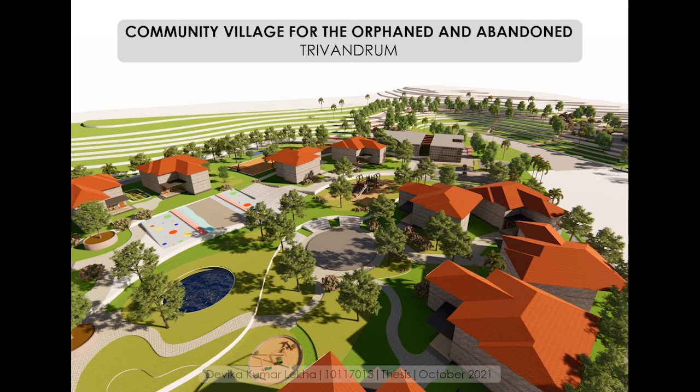My name is Devika Kumar and my thesis topic is Community Village for the Orphaned and Abandoned, Trivandrum. What is an orphanage? An orphanage is a residential institution for the care of children who are orphaned and abandoned, that is, do not have any caretaker to look after them and their basic needs.

These children come from various disturbed backgrounds and are deprived of all the basic necessities of life, which also includes happiness, comfort, and care. The number of orphans globally is noted to be on a drastic rise due to factors like wars, poverty, epidemics, natural disasters, and the list goes on. The children left behind lead terrible lives, and the reflection of their scars remains throughout.

This is where an orphanage comes into picture by providing a home and a board that provides them with basic necessities such as food, shelter, clothing, and above all, care and comfort. According to UNICEF, which is the United Nations International Children's Emergency Fund, an estimated 153 million children worldwide are orphans, and this is still on the rise.

The global estimate of countries with highest orphan rates shows that India falls among the top 10 countries that contribute to the world's large orphan population. In Kerala, orphanages constitute the highest in number among the types of care homes in the state. The present condition of a majority of these orphanages is of poor housing quality, and the so-called orphanages are usually old buildings that once served a different purpose.

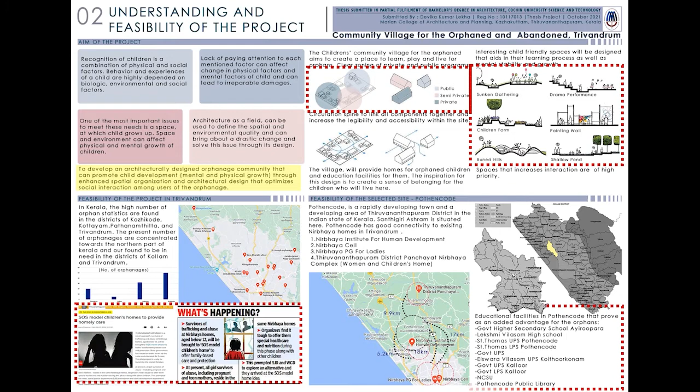I have chosen my site at Pothencode considering its development, good accessibility and most importantly, its proximity to existing Nirbhaya homes in the city. The educational facilities in Pothencode also serve as an added advantage for the orphans.

Site analysis, location and context. The site chosen is located in Pothencode and the land is owned by the Shantigiri Trust. It is 25 acres in area and currently a vacant plot. It is situated exactly 1 kilometer east of the Poolunthara junction and all necessary services are located in a radius of 7 to 10 kilometers from the site.

The Poolunthara junction is located on the main central road, which is the Kazhakuttom-Kilimanoor road. The secondary connecting road connects it to our site. The neighborhood context of the site is residential, with the maximum building height being 8 meters. The commercial area is located on either side of the main central road.

Major landmarks in the area include the Shantigiri Ashram, which is located approximately 5 kilometers from the site, the Shantigiri Ayurvedic Hospital and Research Center, and the Siddha Medical College, all located in close proximity to the site.

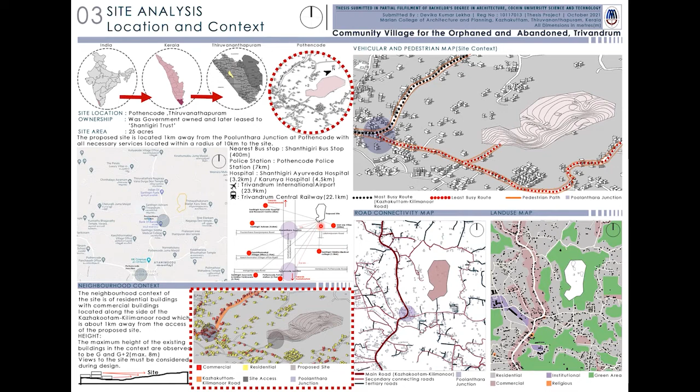Site and its features. The site is currently a vacant plot with thick vegetation and used for small-scale purposes such as to dry cow dung for medicinal purposes of the Shantigiri Ashram. Climatic study of the site throws a light on its wind direction, which hails predominantly from northeast to southwest direction. The temperature graphs show that the maximum temperatures occur during the months of March and April, and the monsoon is recorded from June to September.

Since the site consists of alluvial soil of high fertility, it consists of thick vegetation that mainly includes trees such as coconut, teak and mango. The site topography is a hilly terrain with contour of maximum height of 14 meters. The site currently has a temporary residential area for workers of the Shantigiri Ashram. Figures of the site drawn show wind flow, natural drain of the site and its highest and lowest points leading to its catchment areas.

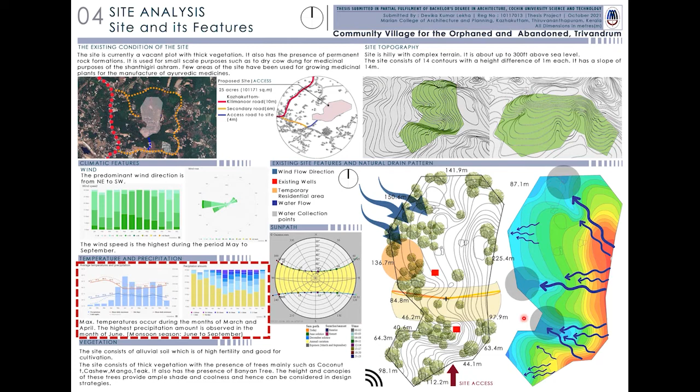Site views, sections and SWOT analysis. The site views depicted show views to and from the site. Due to its thick vegetation, the views are mainly positive views of lush green surroundings. The section of the site shows the contour and gives an outlook of its slope. The SWOT analysis draws attention to its design in manners of accessibility and high elevations that should focus on the safety of children. The site contours enable connection as well as provide an opportunity to explore in terms of connectivity between the spaces.

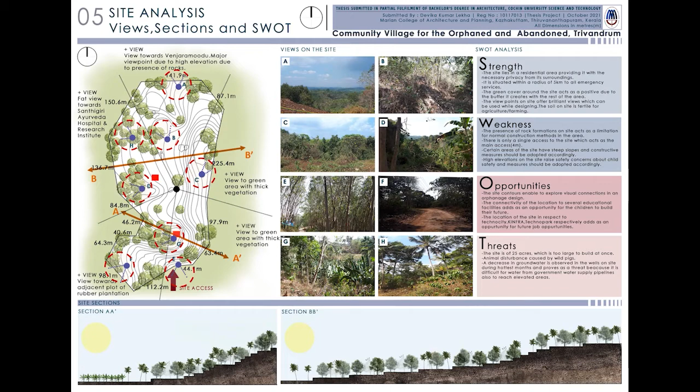Design strategies and inferences. This sheet shows the inferences gathered from my study. Location and neighborhood context-wise, the site is at an advantage of being in a residential zone away from the main city disturbances, as this provides it with its required private zone and also a residential setting. The site accessibility is limited to just one access or entry, and alternative entry points are to be considered. The site proximity to the main road and primary services such as hospitals, police station within a radius of 4 kilometers proves an added advantage.

The existing site contours enable to explore different methods of construction considering the natural drain. The vegetation of the site shows us the presence of large canopy trees that can be used extensively for shading and cooling purposes. My project calls for a lot of open spaces and gathering spaces that includes play areas, and hence a majority of trees are to be and can be incorporated in the design. The vegetation can also be used as buffer regions to segregate private, semi-private and public zones on the site.

The consideration of climatic factors proves the feasibility of an open plan, which is the main objective in the community village. The sun path is from east to west, and hence orientation of buildings can be done in the same orientation with proper shading devices, and north to south direction regions can have more of open and gathering spaces. Wind cooling design strategies such as wind catching towers, jali walls, etc. can be provided. KMBR rules considering existing wells on site state that the location of septic tanks must be 7.5 meters away from the wells.

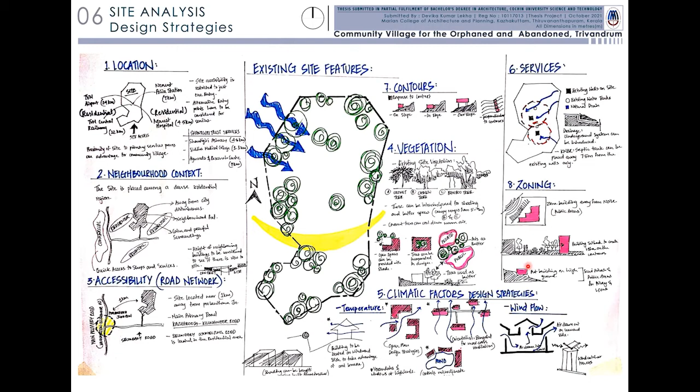Live Case Study 1, Sai Gramam, Trivandrum. The Sai Gramam orphanage is located in Thonnakal, Trivandrum. It is an orphanage for boys of the age 4 to 18 years. The orphanage houses various activities as well. The reason I chose Sai Gramam is due to its community-type living and how various activities are brought into the project. I also focused on how the spaces are arranged and how the relationship affects the children.

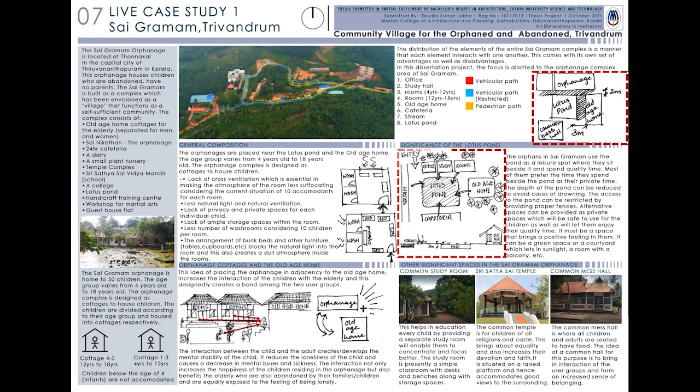Live Study 2, SOS Village, Kochi. I studied the SOS Village, Kochi that nurtures over 150 children. It is situated in Aluva. The reason why I chose to study this is because of how it is planned. The SOS Village is planned in a manner that it has 15 houses with 8 children housed in each, and it is arranged in a semicircular pattern on the site. Each home has one caretaker who is called the mother to look after the needs of the children belonging to that particular house.

The site is designed with ample shade provided using its landscape and creating exactly a residential neighborhood atmosphere. This proves to be a really good factor that enables the children in the village to grow mentally and induces high levels of interaction between them. The major difference I noticed in the two live studies was that in Sai Gramam, it was more of a hostel or dorm arrangement with common mess halls, etc., whereas in SOS, it is mostly a home feeling with each house allotted its own kitchen, dining, and living areas.

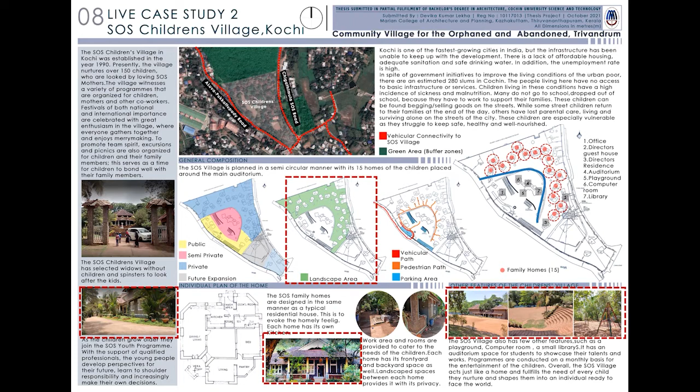My literature studies included the Children's Eco Village in Kenya. This case study was mainly taken to study how the spaces are zoned. The design also throws light into how the village is designed in response to the high temperatures of Africa. It is planned as a self-sustaining village with clear zoning of programs.

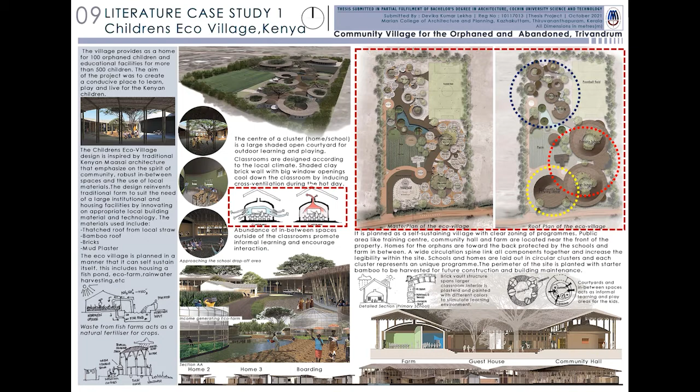Public areas that include community hall, training centers are zoned near the site entry, whereas semi-private spaces follow after the public areas. The residential areas contribute to the private areas that are located further towards the end of the site, limiting its access and hence keeping its privacy. The climatic response in the design is adapted through its materials and large openings provided. My second literature study includes SOS Village, Djibouti.

This project is done on a site that registers some of the hottest climates in Africa. The design typology of this project is that of a Medina, which is a traditional Arabian concept of a city. The planning of the village is done in a manner that it is a cluster of residences with plenty of open spaces between them. Since the clustered arrangement lacks cross ventilation, the buildings are designed with wind towers to discharge heat where needed.

The overlapping homes ensure ample shade, which is important considering the climate. The narrow streets and squares formed between the buildings become the main spaces of recreation for the children. Comparative analysis, case studies and inference.

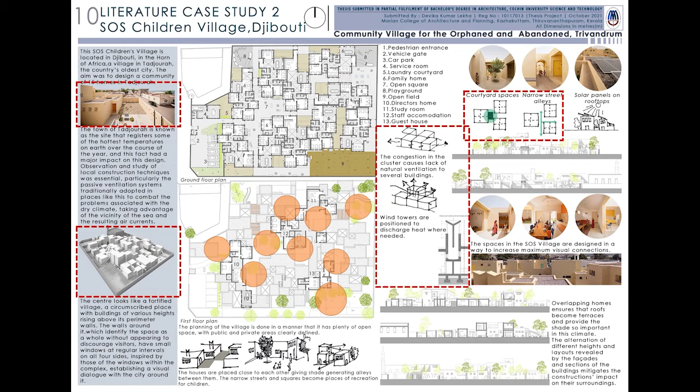From all the comparisons, the inferences derived are: location and context-wise, the site chosen is apt, adhering to a residential neighborhood setting, and all primary services are located in close proximity to the site. Accessibility to the site should be made easy considering emergency situations. Programs and activities: a variety of programs and activities can enable children to interact well and also nurture the talents in them. Building typology and materials used.

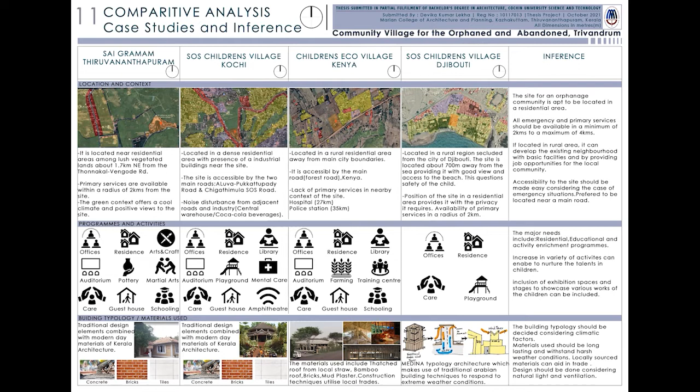The building typology should be decided considering climatic factors. Locally sourced materials can also aid in trade. Materials used should be able to last long and withstand harsh weather conditions. Site zoning and building orientation: the public spaces such as offices and administration can be zoned near the main entry of the site, and this provides the privacy required for the cottages which are zoned further into the site.

The space in between the public and the private zone can be used as a connectivity space between both areas of the site. Gathering spaces, open areas and playgrounds: water bodies will be able to control the microclimate in the site, but safety should be kept in mind when providing a water body because the main user group is children. Providing open spaces and playgrounds will aid in a high level of interaction among the children, and this will aid in their mental growth.

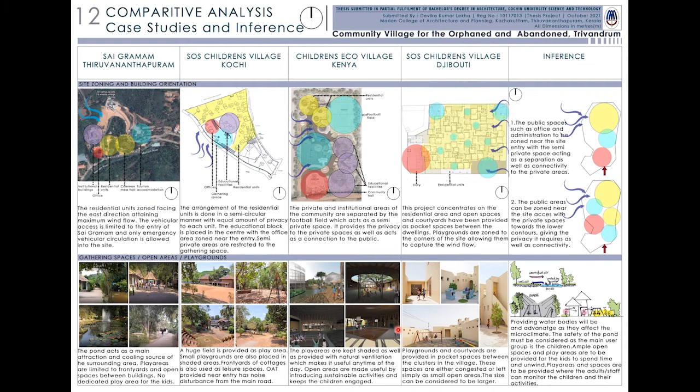Zoning. My next step is zoning, and hence before that, I am identifying the buildable and non-buildable regions of the site. The site is contoured with a maximum height of 14 meters, with each contour height difference being 1 meter. The contours flow from east to west, with the highest point at level 101 and the lowest at level 88. To identify the buildable and non-buildable regions, I have done a slope analysis.

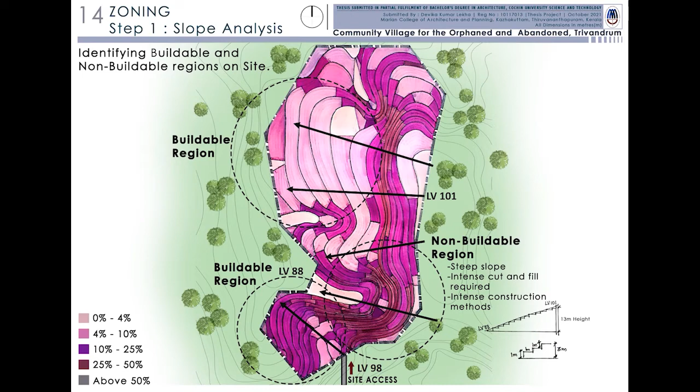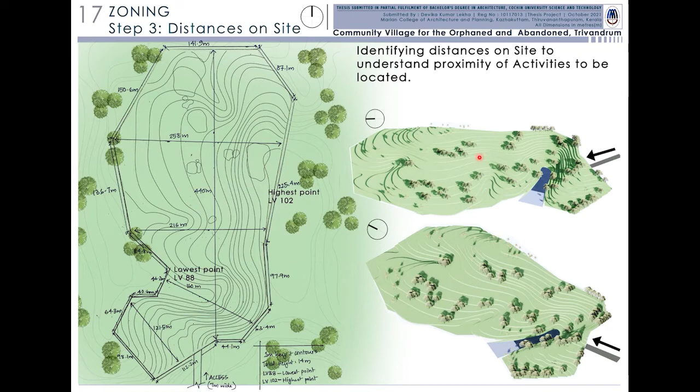The next step I have done in the process is identifying the proximity and distances from regions of the site. This is done to identify proper placement of activities on the site and suitable pedestrian access. The site model gives a deeper understanding of the site contours and slope. From all the above steps, I have concluded with the final zoning. The main factor I based my zoning on is privacy.

Starting from the main entry to the site, I have zoned the public area closer to the main access so as to restrict vehicular movement further into the site, considering the presence and safety of children. Next is the non-buildable region of the site, which can be used as a buffer space for the further zoned spaces. This region acts as a semi-public region with stepped landscape features, allowing the contour to retain its original characteristics. Since the sloped region is located at level 101 and slopes down to level 88, the lowest point, interesting visual connections can be made using spaces.

The lowest region of the site acts as the main catchment area, and hence during monsoon it can act as a temporary water body with a maximum water depth of 1 meter. During the non-monsoon seasons, it will act as a platform for kids to play. Moving further into my site, I have zoned the semi-private area. This consists of the admin block, multipurpose hall and the cafeteria. The reason for zoning this in the center of the site is visitor access.

If a visitor comes to the site, the main public area consists of the training and counseling center, and hence access can be restricted at that point. But only a limited number of people would want to visit the orphanage and have orphanage-related activities, and they can be admitted to the admin block. Zoning the admin block in this region can also act as a privacy buffer to the residential area, which is located further into the site. The private zone of the site consists of the residential cottages and will house 12 individual homes for the children following a cluster concept.

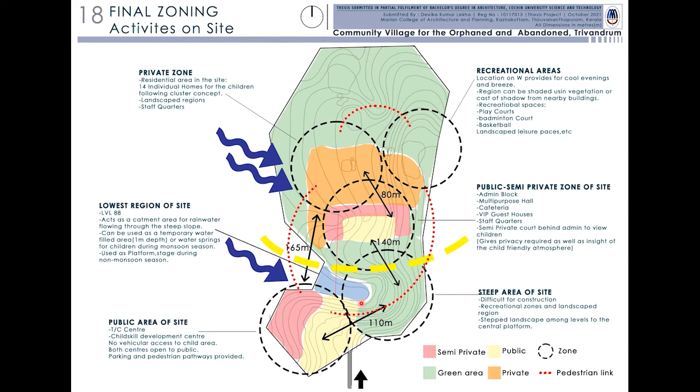Block placing. This shows where I should place my buildings. The public zone consists of the Training and Counseling Center and Child Skill Development Center. It is located at the main entry as it's open to public access. It prevents excess vehicular movement further into the site.

The Child Skill Development Center is again zoned based on privacy with the Training and Counseling Center. It is located at lower contours compared to the Training and Counseling Center. Zoning on lower contours provides it with privacy again from the vehicular region. The main road enters the site at level 98, and this is to be followed till the admin block.

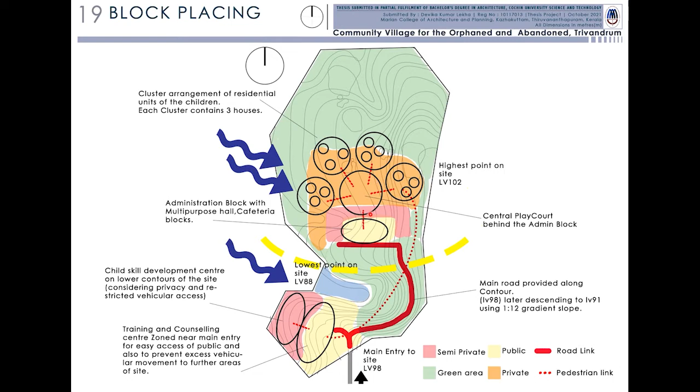The residential areas are then zoned based on a cluster concept, with each cluster consisting of a group of houses and spaces of interaction between them. Concept: sense of belonging. The concept of the design is applied to the core of this project, which is the residential area. Sense of belonging is about how I can create a feeling of home, a feeling of intimate spaces in my project. So how this has been done here is by taking the idea of clusters.

Each cluster will have a group of 3 houses each, and on site, 4 clusters as such will be placed in relation with each other. When I tried doing that, I understood that in order to have a connectivity or relation of each cluster to one another, they need to have a common focal point or common center.

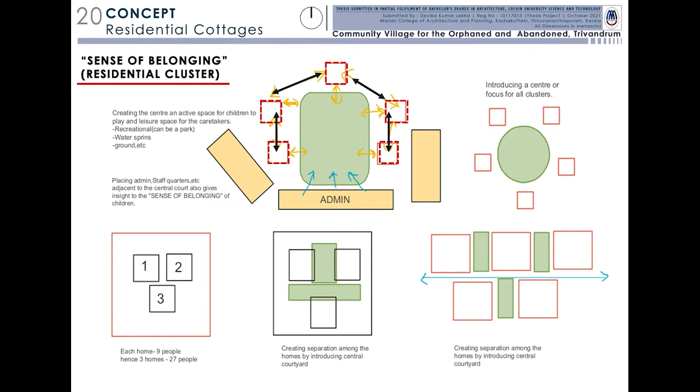This common focus or center can be developed into a recreational space, which can be provided as a hangout space or a play court. This common space will be zoned in proximity to the admin block in order to provide a view into the atmosphere of the orphans playing and having fun. So the visitors here can taste a sense of belonging and the vibe of the orphanage atmosphere, of the children and their lives here through this project.

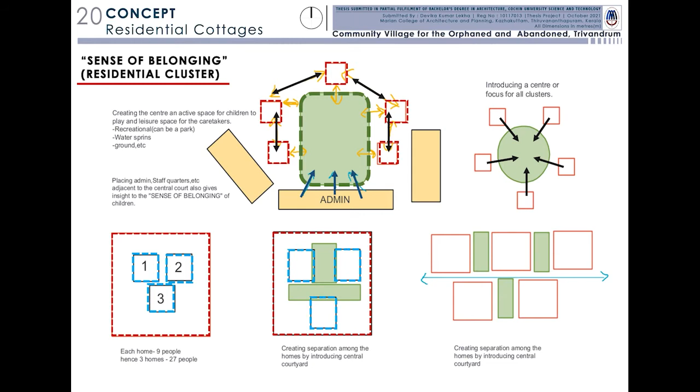The clusters are also provided with connections between them. Clusters here are provided as landscape regions with 2 to 3 houses each. The houses will also be separated from each other using landscape features such as courtyards, gardens, and other buffer vegetative spaces.

Final design, master plan. The master plan shows the complete layout of various buildings and activities on the site. Starting from the main entry, the road takes a turn to the Training and Counseling Center with the parking area located adjacent to it. The road reaches the drop-off at the Training and Counseling Center and further takes a turn to exit the site. This is the vehicular pattern of the public region.

To access the admin block, the road at the turn moves further into the site, leading to the semi-public region, which is the admin block and its features. The parking space provided in its adjacency aids visitors and staff to the area. Pedestrian paths are provided on either side of the road using trees for shade across its perimeter.

The portion at the center of the site, which is also the lowermost region, acts as a common platform for various events and also as a leisure space. The surrounding contours are provided with stepped seating while retaining the original characteristics of the contour. A buffer region is provided between the road and the platform using the contours by keeping them in their original form, also adding to the beauty of this project.

The residential region, being the core of my project, is surrounded by a 7-meter wide road whose sole purpose is to accommodate emergency vehicles only in case of urgent situations. The road at other times acts as a cycling track around the residential community. The residential community consists of 12 houses that house 8 children each with a caretaker to look after them.

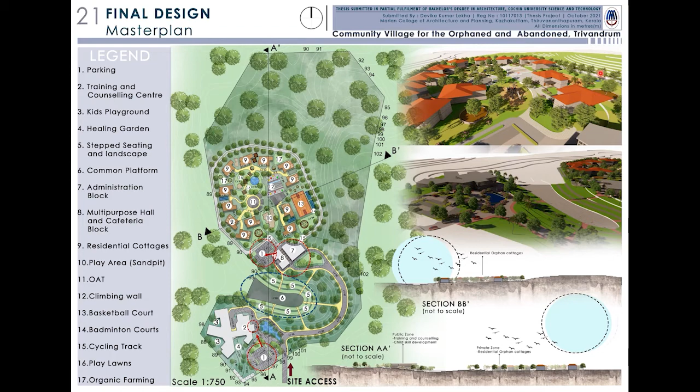Training and Counseling Center. The Training and Counseling Center is provided for the students from the orphanage as well as remains open to public. It provides training programs such as stitching, tile and block printing, seminars, and talks on self-development and jobs.

Moving to its plan. After drop-off at the porch, the main entry opens to a lobby that houses the reception. Placed near the reception is the office wing of the building that has staff cubicles and VIP rooms. It has a bookstore that can be accessed from the lobby as well for the visitors. On either side are the public washrooms and main canteen. The canteen has a service entry access that is in connection from the main road.

A ramp from the lobby transits into the next level of the plan. This level sits 1 meter lower than the first portion of the building. It consists of staff rooms, seminar rooms, and also the counseling room. This level opens to an outdoor area of the healing gardens and lush landscape in the surrounding.

A second ramp transits to the next level of the building that consists of the workshop rooms, washrooms, cafes, martial arts studio, and the library that offers views to the surrounding green of the site. The building also accommodates plenty of wind flow as its orientation is in a way to capture the same. These are a few 3D views of the block.

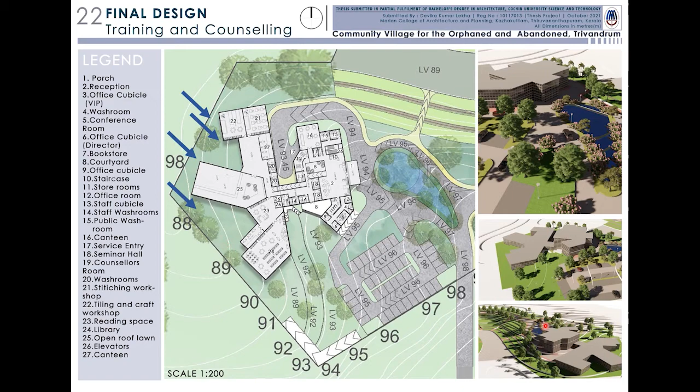Child Skill Development Center for ages 4 years to 8 years. The Child Skill Development Center is situated on the last end of the Training and Counseling building. It is done as the ground floor at level 89. The Child Center is located at the lowermost contours of the site in regard to maximum restriction of vehicular access owing to the safety of children.

Moving to the plan, the entry of the building at the lower level is accessed by a ramp 3 meters above. The entry of the building leads to the lobby that has an office, VIP room and meeting room for talks and meetings for parents. It has washrooms for visitors on either end. Moving further into the building is an indoor courtyard that offers views to the outdoor play area.

The indoor play areas consist of child-friendly spaces and furniture with a colorful theme. The classrooms have one-side access to the outdoor play areas where the kids can play. An emergency medical room is provided for use in urgent situations. The proximity of a number of hospitals to the site adds as a huge strength.

Staff cubicles are provided for temporary use even though a majority of time they will be spending with the children. A common canteen is provided for the orphans of the community and staff for lunch. It can also be used by the public user groups. Shown below is a section of the entire block as to how it is situated at levels.

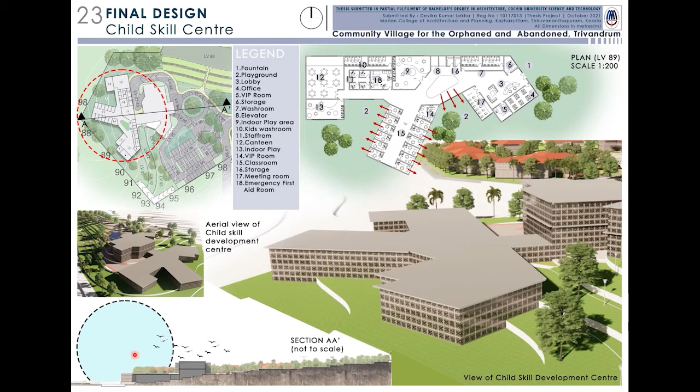Residential cottages, the core of the project, the community living. The residential area of the project aims to create a sense of belonging for the children. There are 12 houses in the community that are grouped into clusters. Each cluster is separated by recreational spaces such as sandpit, badminton court, and lawns. These clusters are further separated from each other using similar features that include organic farms that can involve children in the farming activities and also give a small-scale produce to the cottages.

The central focal point, as explained in the concept, is brought here in the form of play lawns, playgrounds, and a small OAT. The closeness of these features brings about an intimacy in the whole community setting. The climbing wall provided adds color to the atmosphere that tackles the playful scenario of the young minds. The sand pits with playgrounds offer play to the children residing here.

Tree grills are provided at several points in the site and act as seating spaces as well as hangout spots. The recreational portion consists of the basketball court and badminton courts. Landscape features provided enhance the beauty of the community and add to the homely scenario. The main stair provided to connect the lower level of the community to the higher, which is at a height difference of 2 meters, acts as a seating space and also provides access to the houses at the intermediate levels.

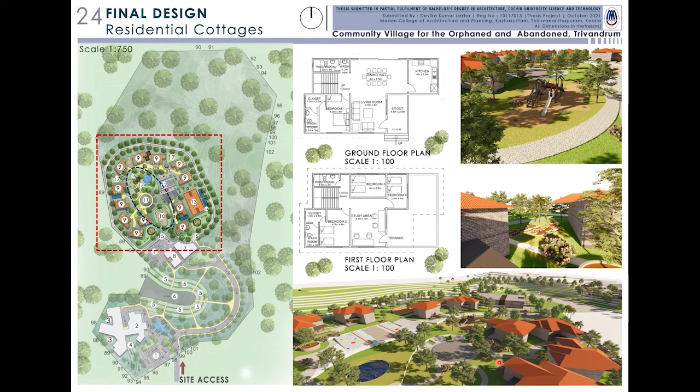I finally conclude my project with several pictures of the community living, which contributes to the sense of belonging of my project. Community Village for the orphaned and abandoned, Trivandrum.